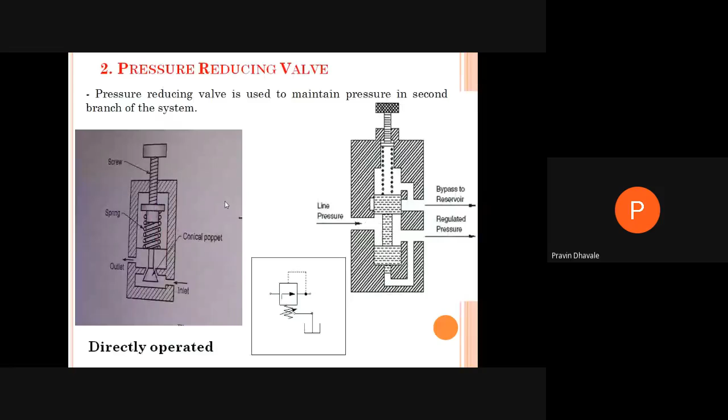Hello. Is the screen visible? Hello. Yes, sir. Okay.

Okay. In the last lecture, we already started pressure control valves. Those are very essential in order to provide the controlled amount of air to the actuator at a set pressure, in order to safely operate the different devices in a pneumatic system. So it will help to increase the life and reliability of the various components of the pneumatic system.

As far as pressure control valves are concerned, they are used to provide the required set pressure of the air to the different components of the pneumatic system. They are mainly divided into 5 types. That is the pressure relief valve. Pressure relief valves are used to set the limit of the overall pneumatic system, at which pressure it should act.

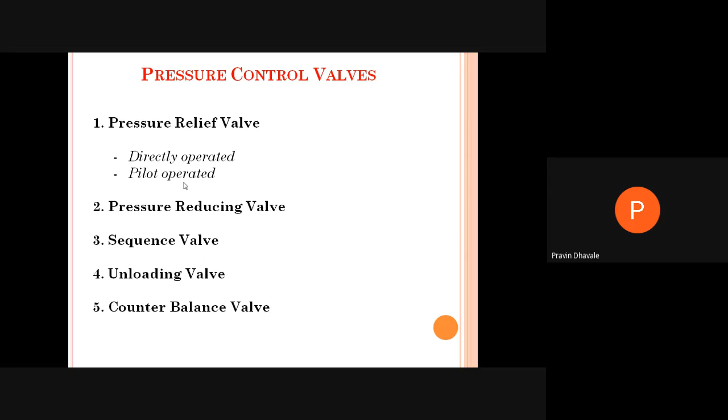What is the function of the sequence valve? Whenever you require to perform different operations in a proper sequence, at that time you have to use the sequence valve. That is, when the first operation is in an almost completed stage, at that time the second operation is to be

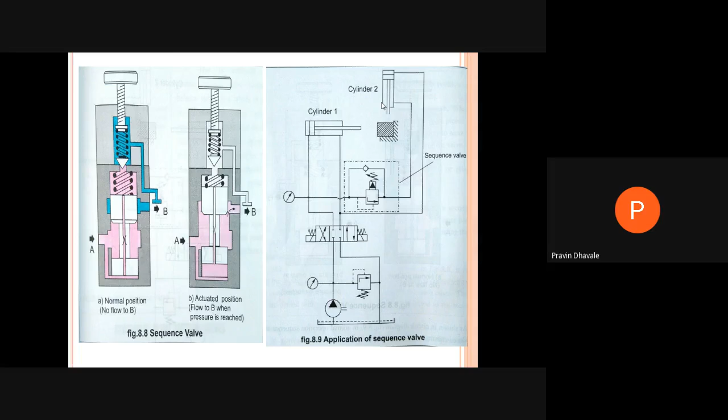Then counterbalance valve. Now what is the use of counterbalance valve? This valve is used to avoid uncontrolled movement of the cylinder. This is very important. Means in order to avoid the uncontrolled movement of the cylinder you must have to use the counterbalance valve. Where it is to be used? It will be specially used in earth moving equipment.

In such kind of the counterbalance valve, it has two pilot relief valves. Those are connected with each other.

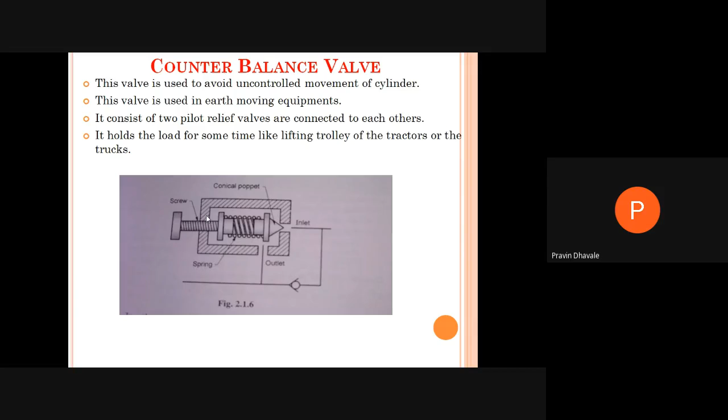Inform me when diagram is over. Is it over? Diagram is over. Am I audible? Yes, sir. Okay. A division student, write your roll number. Okay. Whether A division is over, B division student, write your roll number. Over. Anybody is remaining from A and B? Okay.

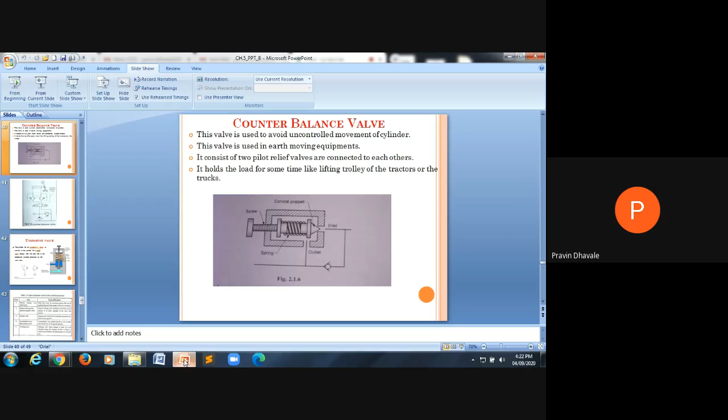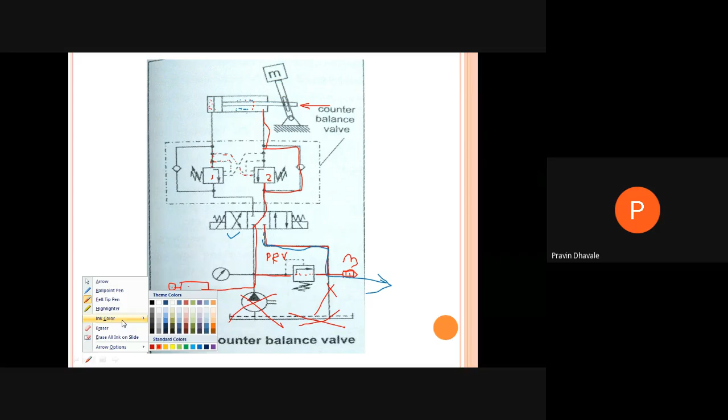Right? It will try to move through this check valve, but this flow is blocked. So here it will be passing over here. Now this is again in closed position, this pressure relief valve. We are setting some pressure to sense for this first pressure relief valve in order to open it, right? Also, it will take some signal from the second pressure relief valve. Because of that, it will operate, and these two ports are connected.

So whatever air is on the left hand side of the piston will come over here. Now this point is nothing but this. This is the connection. So we may draw this line, and whatever the air, it will be coming over here and directly thrown out to the atmosphere. In this way, when the second position is in actuation, these operations take place.

So in case of a counterbalance valve, we are controlling the uncontrolled motion of the cylinder, where we are taking the two pressure relief valves which have a pilot signal individually as well as from each other.

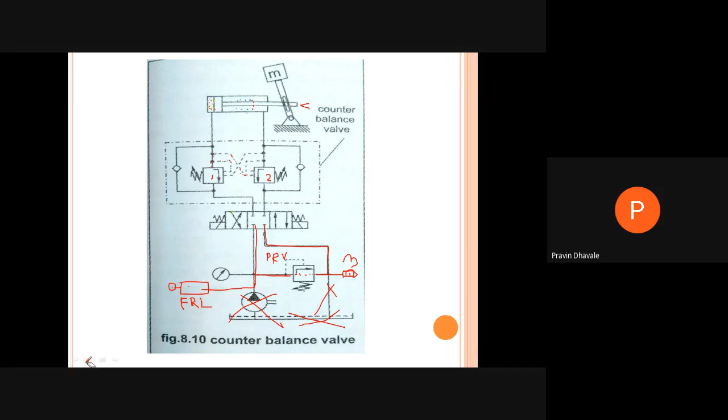Now the last valve from the pressure reducing valve, that is the unloading valve. It is the same like a pressure relief valve, right? It will be used to unload the specific application. For a particular application, in order to lower the load, we are using the unloading valve.

No doubt it is a spring adjusting type valve. When pressure is to be achieved, this connection is to be connected and air is supplied to the atmosphere. But in case of an unloading valve, there will be no pilot line connected to sense the pressure at the inlet of this valve.

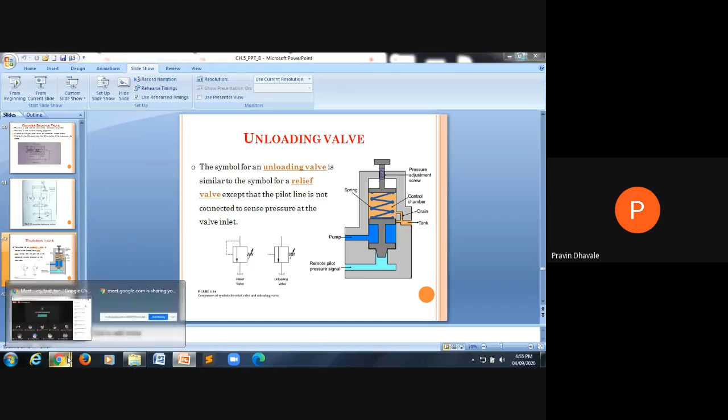Pressure reducing valve maintains a prescribed reduced pressure at its outlet regardless of the valve inlet pressure.

Then the sequence valve directs the flow to more than one portion of the fluid circuit in a sequence, meaning it carries out different operations in a sequential manner.

Counterbalance valve is also called a back pressure valve. It allows the flow of air in one direction and the flow in the opposite direction is restricted.

The unloading valve allows the pressure to be built up to an adjustable setting, then bypass the flow as long as the remote source maintains the preset pressure on the pilot port.

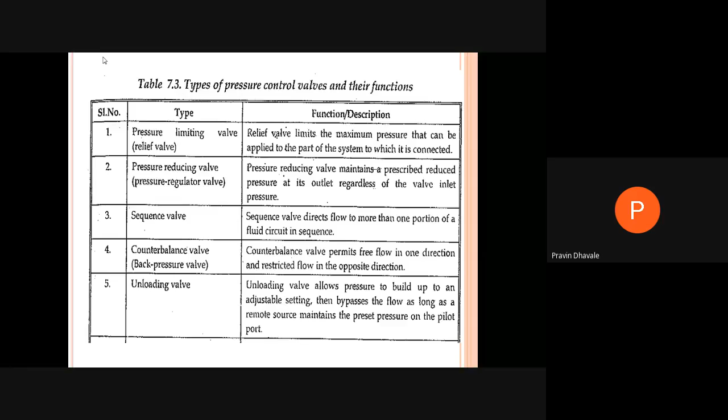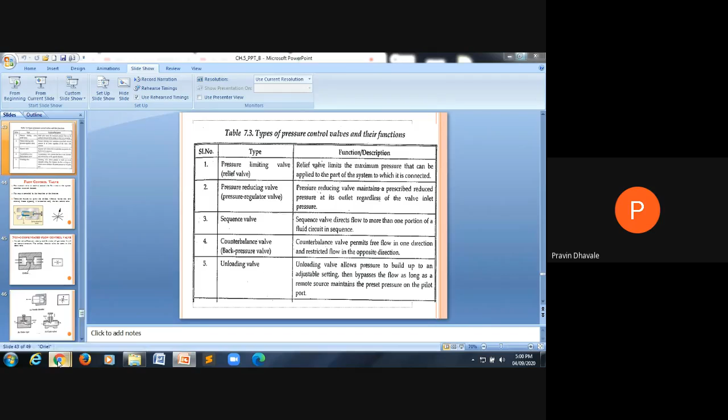We will stop over here. In next lecture, we will start with the flow control valve. I think from yesterday and today's lecture, we have covered in detail the working of a pressure controlling valve, right? Any doubt?

No, sir. Yes or no? No, sir.